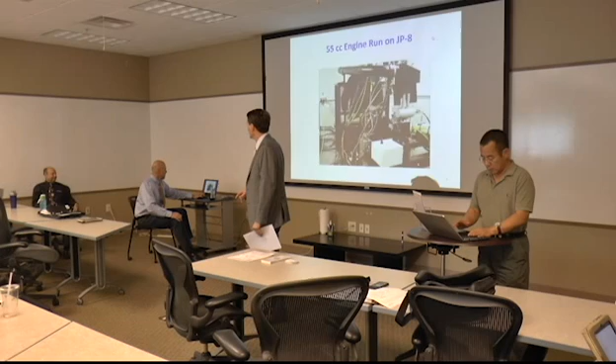Before I start though, Jim, I was just thinking of something while you were speaking about attendance at these collider events. Do you open this up to, say, second to last year, juniors, seniors in STEM? Anybody can come to these. Is anybody here a student or a recent graduate? No, we haven't had. Not yet, we haven't had. And the reason I was thinking about it, yesterday I met with a young gentleman who just graduated from UC mechanical engineering, but he really wants to get into the aerospace industry.

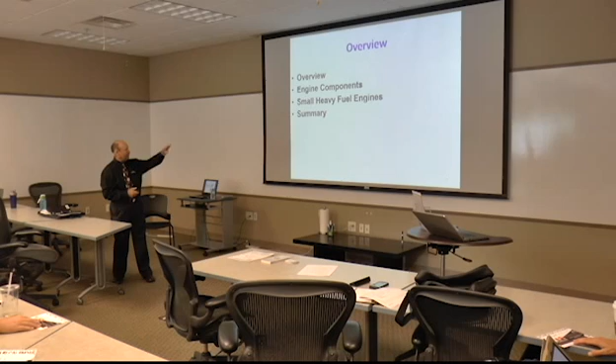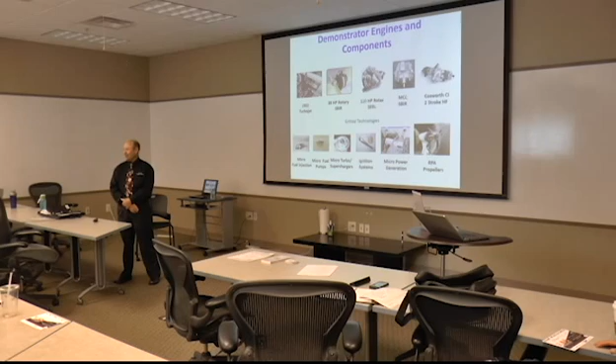Okay, I think when I first started this, they asked me to do one little SBIR project on an engine, okay? And I thought, gee, that sounds like fun for about 9 months, okay? Well, I think 9 months turned into about 12 years.

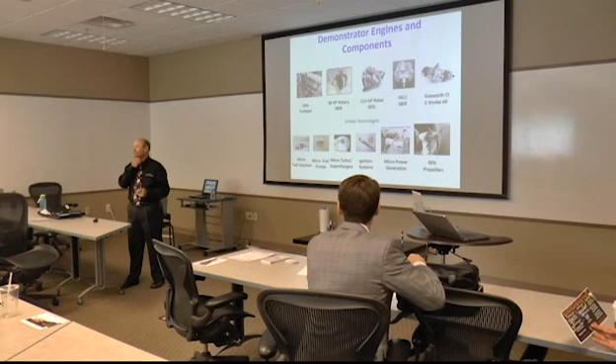So I started this with one project, okay? And then we got to a certain point and I said, well, what do we really need to do to advance this technology? And we had a meeting. I had a meeting with an Army guy who's now retired too. But we were talking about what do we need to do to advance this technology.

So we decided that commercial off-the-shelf components would not work for these small engines. Okay, so we decided we needed micro fuel injection, micro fuel pumps, turbochargers, power generation, so we needed everything on a much smaller scale. And it would have to be lightweight. A lot of these, some of these engines were using almost commercial off-the-shelf generators, which can weigh 7 or 8 pounds.

So what we decided, and then I said, okay, now how are we going to get money to do this? You know, and somebody suggested, well, if you go to OSD and you have an Army and a Navy counterpart, you can get OSD money.

So I go, well, okay, I got an Army guy, I gotta find a Navy guy. So it just so happens, there was a gentleman named Mike Gahn, who used to work across the hall in AFRL. He went out to China Lake, and he was actually working on the Ultra Endurance UAV, which was the Navy's, which has now become the RQ-21 Blackjack. So I said, Mike, I just want to use your name, we're going to try and get money.

And actually, the stars must have aligned or something, because everything just fell into place. So we submitted the projects, we got all the funding in, and we got started on all these phase 1 SBIRs, okay? And I think that round, I got 142 proposals.

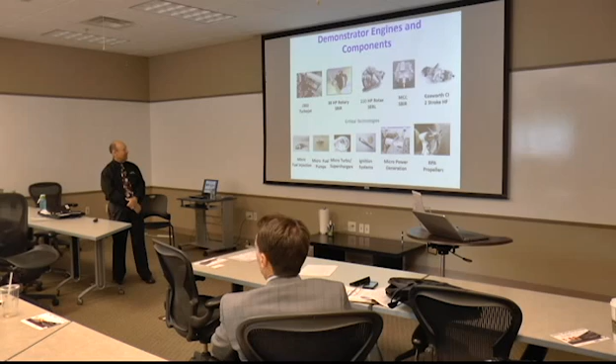Okay, but the 115 horsepower Rotax on the Predator runs on avgas. And for that engine there's 2 test cells over on the base, in the Small Engine Research Lab, and they've probably been doing experiments on that engine for about 10 years. So they probably know more about the Rotax than Rotax themselves, okay?

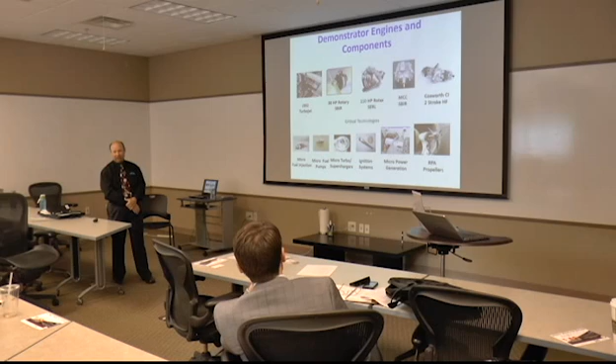That's a 2-stroke compression ignition diesel. And while I could put up a whole bunch of pictures of it, this is the only one I could pull off the internet that's not proprietary. But I will say this, it's 12 horsepower. The Navy wants to use it on the RQ-21 Blackjack. They have spent probably $6 to $8 million in development of that engine.

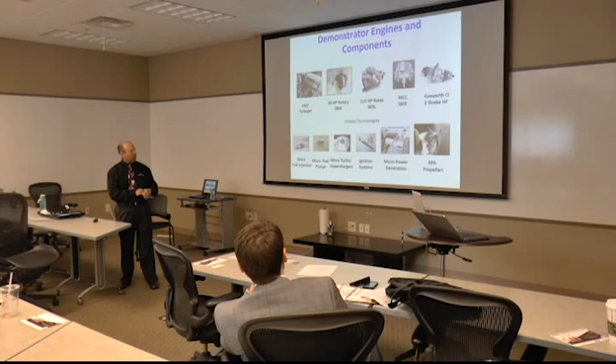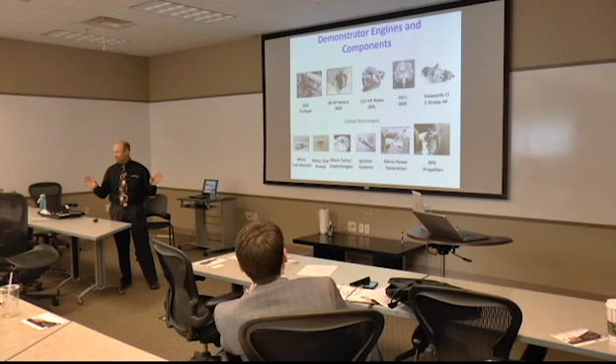So it is running, it has flown. I think they're working on integrating it into the RQ-21, which is gonna be one of the Navy's new airframes. And we will probably be doing some more work on that one, the Air Force actually helping the Navy out. Like I said, all us guys in UAS propulsion, Army, Navy, Air Force, we all get along real well. Most of us just want to advance UAS propulsion.

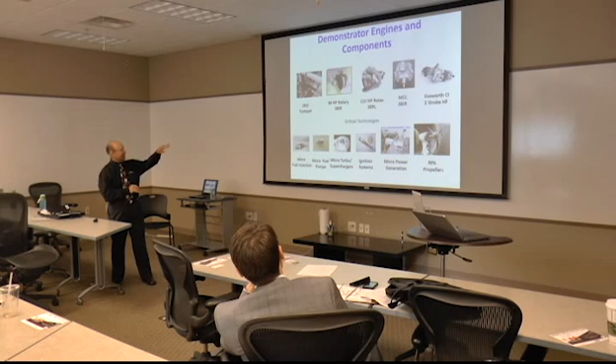So, I hate to pick favorites, but that's one of my favorite engines, okay? And then, these are just some of the engines we're using today.

What we needed to do is, critical technologies were fuel injection, pumps, turbochargers, ignition systems, micro power generation, and we've actually done some work on propellers. Now the problem with propellers is they make noise. So

This probably sounds a little silly, but the enemy actually uses dogs to detect propeller noise. I can't hear them, but it's kind of strange. We did find this out at one point in time, so we started working on quiet propellers.

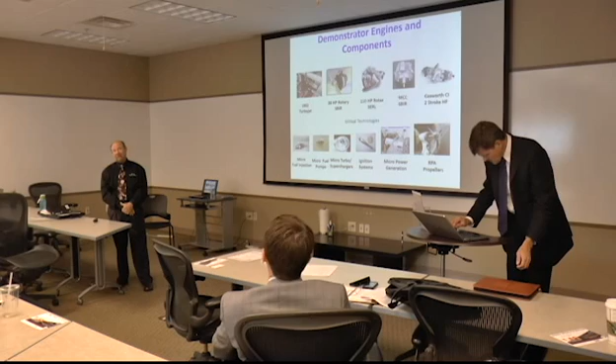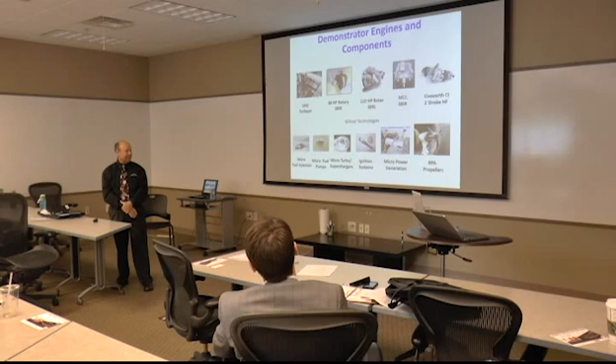If you really think about it, we make special propellers for C-130s and other aircraft. A lot of the UAV propellers are more or less hobby propellers. They're not actually designed as a specific component for a UAV. So that's one of the things we are going to have to work on. There's several propeller companies now, but one of the things we are going to have to do is really work on quiet propellers.

Okay, I'm going to talk a little bit. This is one of the several programs we did. It's called the Charged Fuel Injector. Without going in real deep into the theory, you put an electrical charge on a fuel droplet, and it actually breaks it into smaller droplets. If you remember from basic physics and electrostatics, if you put minus charges on each, they're going to repel. So you're going to get a pretty much homogeneous charge.

And it actually helps if you're going to run a fuel charge around a 90-degree turn; it'll actually coalesce when it makes that turn, so the droplets run into each other and start forming bigger droplets. The magic number is about 10 microns to make these engines run on heavy fuel. So you've got to make the droplets real small. We were able to accomplish that with these little elements. If you put little plates in there, you could actually make the fuel charge make a 180-degree turn. So it was kind of neat.

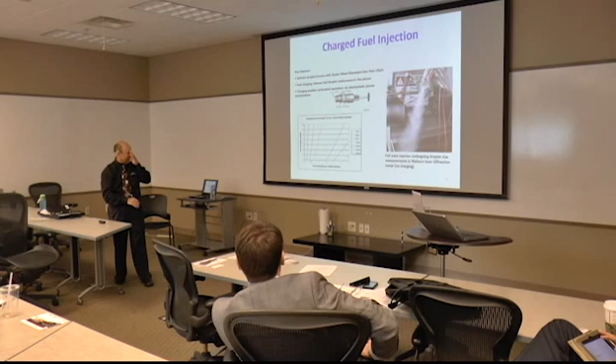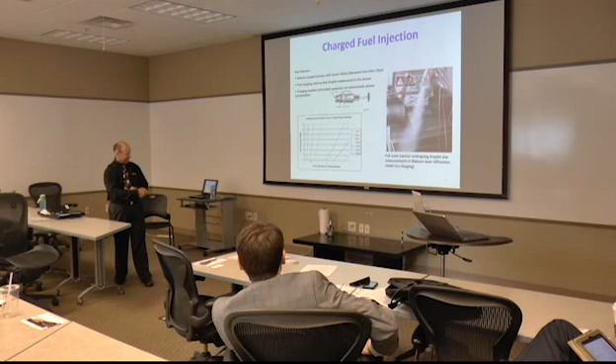This is one of the few things that really hasn't made it to the field yet. We actually did use this in a CFR engine, and it worked, but it never found its way on board yet. So it's one of the few things that we haven't really got on board yet.

Now, micro fuel injection. That was a continuous system; this is a pulse system. Just like in almost any vehicle, it pulses. As you come up on compression, you dump the fuel in. One of the problems we had is trying to use a diesel injector, which probably weighed 3 to 4 pounds. So we had to come up with another generation of micro fuel injectors. And to make them work, you obviously have to have a pump, and to do the pulsing, you need a controller.

This is probably the 3rd generation, after the 1st and 2nd generations we made. We're probably pretty close right now to having a system with injectors, a pump, and a controller that can be adapted to most small engines. What we have found is, I think we're at around a 50 cc limit. We're going to try to do a 28 cc, but 50 cc seems to be, at the moment, the limit. But we are going to start doing some experiments and look at doing a 28 cc.

Now, the advantage of this is, several of the engines are compression ignition, so we've actually changed gasoline engines to run compression ignition, so when you inject the fuel, you close off the exhaust port. With any two-stroke, normally you're throwing a little bit of charge out the exhaust port as the fuel comes up and charges the cylinder. So two-strokes, while they work well, are generally inefficient. You lose a lot of SFC there, usually around 1.2.

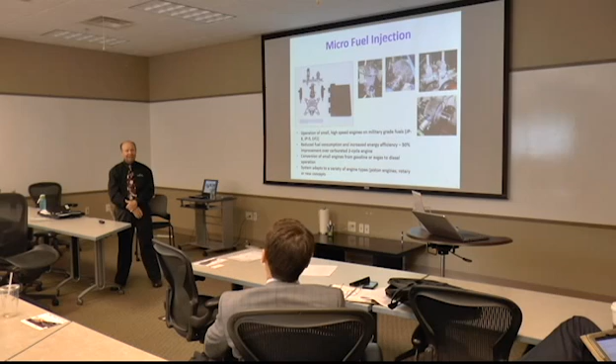Most people will do a throttle body system, in other words, some sort of fuel charging device outside the cylinder. You normally will lose some of your horsepower. So if you have a 5 horsepower engine, you may get 4 or 3.5 out of it. We were actually able to maintain horsepower, and we got the SFC down to about 0.6. So we improved efficiency, got better SFC, and it seems to run pretty well on that.

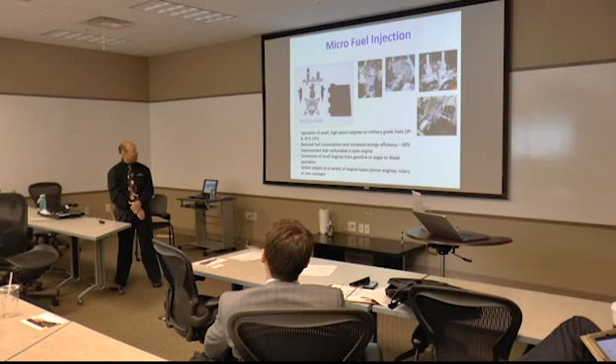So the solution to the problem is injector, pump, controller. You need all 3 of those in order to make this system work. This has pretty much been adapted to several different engines, and it seems to work pretty well on all of them. And what I'm trying to say is we're trying to get ourselves off gasoline. They want one fuel in the field, JP5 for the Navy, JP8 for the Air Force. If worse comes to worse, you can always run on some pump diesel, okay?

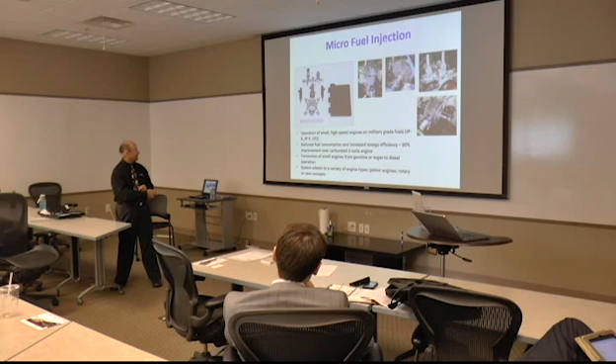Okay, so I just set up a little spray demonstration. If I can get it to start. I just turned everything on. I get a reading. I'm trying to figure out which I can advance. I can do it.

So this is generation 1 injectors, and we were actually measuring the droplet diameter of the fuel, and we also did a sort of magnified, slow video of how it worked. And I mean, it worked flawlessly. It really did for the first generation. And I think we were spraying at probably about 6,000 psi.

So what you want to do is, you've got to do it one of 2 ways. You've got to have a lot of pressure and run it through a pintle, or you have a lot of pressure and you push it through little holes in the injector nozzle. So the later ones, we're using the injector nozzle concept with a high pressure pump. And I think we're up in the 14,000 psi range.

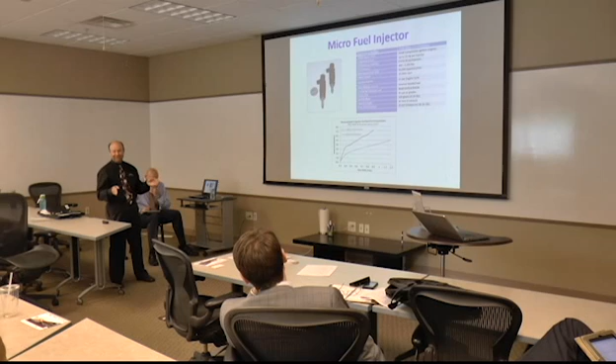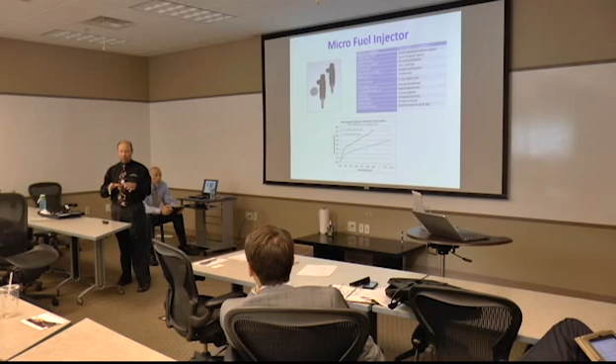So what we're trying to do now with compression ignition diesels, I don't know if anybody in here's got a diesel, but when you inject fuel, you're mixing it with air, and then you're compressing it, getting things hot enough, and it fires, okay? Well, there's a certain thing in there called ignition delay time. So as you mix the air with the fuel, it heats up and then it fires. You get a very violent spike, more than with the gasoline engine.

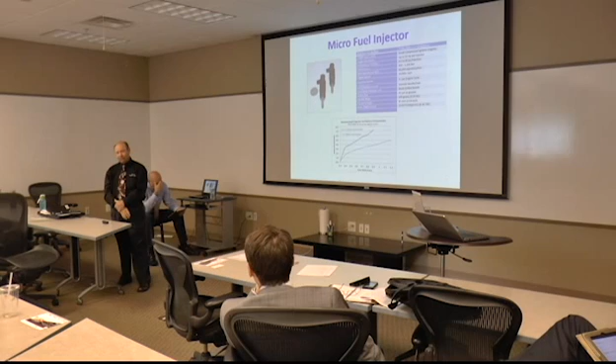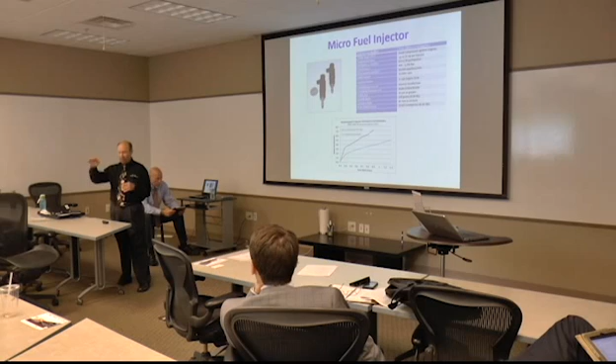So a lot of diesel engines, you have dual mass flywheels that kind of take up for that extremely heavy torque cycle. So on these small engines, what we want to do is called rate shaping. So you do two or three injections per cycle. It'll bring that torque spike down, because on these small engines, you're probably going to have a lot of vibration, and it's really going to be hard on the propeller when that hits. So we want to do rate shaping, bring that torque spike down, and we can do that with an injector like this.

So I can probably show you a little something here. That's the pump, about 14,000 PSI, 300 to 8,500 RPM. It'll run off an eccentric on your shaft, okay? It weighs about a half a pound, and pretty much on this injection system, you can tailor it for your engine, okay? One size doesn't fit all, that's the way you want to look at it.

Now, this is 55cc running on JP8. Everybody's sleeping, this will wake you up. So it actually does work. That's the micro injector on 55 cc's running JP8, maintaining horsepower at about 0.6 SFC.

And we actually learned a lot on this one. Initially, we were starting it with a spark plug, hitting it with a spark until the engine got up to thermal efficiency. And eventually we put a glow plug in it, just like a diesel engine. Keep the air up, it would fire right up. Only needed the glow plug for maybe a few seconds, maybe less than a minute. And once it heated up, it fired right off. And it does a nice job on JP8.

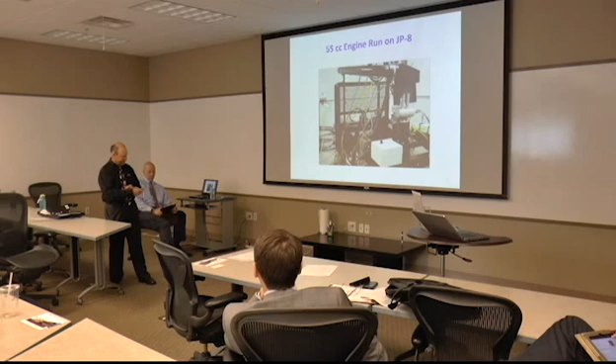And actually, the Cosworth engine, I think right now it's got Magneti Marelli injectors, but it actually has run this injection system and made 12 horsepower. And I think we're going to work on the Cosworth. One of the things we are going to work on is rate shaping. Right now the Magneti Marellis run one pulse.

So what we're going to do is put this injection system back in it, look at rate shaping and smoothing that torque spike out. And the Navy is extremely interested in putting this on the RQ-21. So the Air Force, being the nice guys we are, we're going to help them out.

Also there was this motor-driven micro fuel pump. A lot of times the other pump's mechanical; this one's electrical, okay? And it was actually designed for those instances. If you are running compression ignition, you need a lift pump. Most diesel engines, you have a lift pump till it gets to the injector pump. It could be used for that, or it can be used as a straight pump for either a gasoline or diesel small engine.

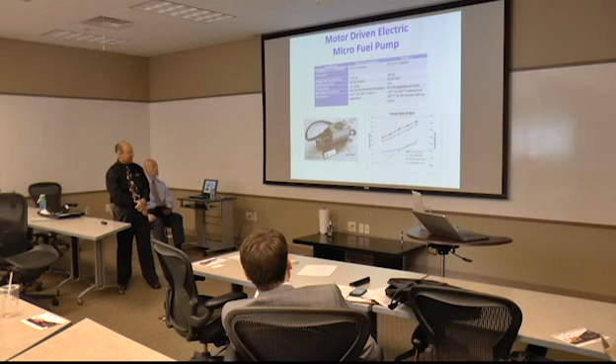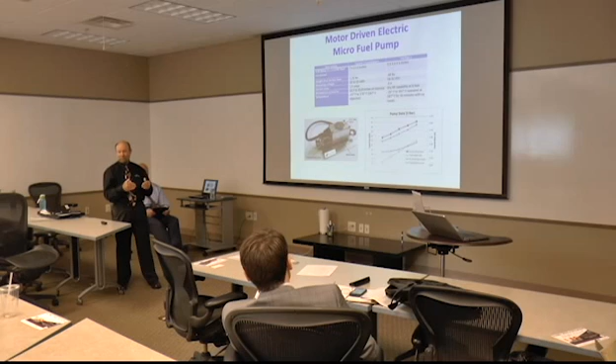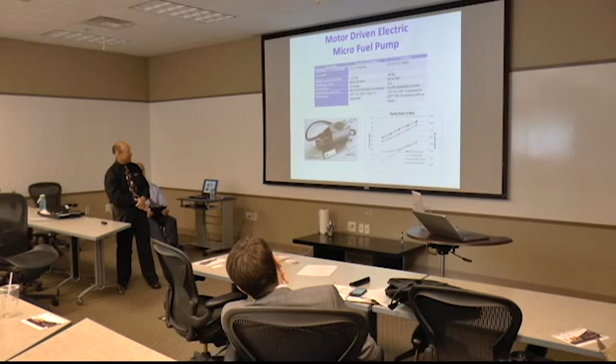But the nice thing about it is most injection systems use a pressure regulator. This pump actually does the pressure regulating for you. So you can ramp it up, ramp it down. Usually it's on a 45-degree angle, and it's not a particularly heavy current draw. It's about 1.5 amps, it'll work anywhere from 18 to 32 volts, and weighs about 1.25 pounds. And I'm thinking we could probably beat a little weight out of that yet. I think we've run it continuously for a couple thousand hours without a failure.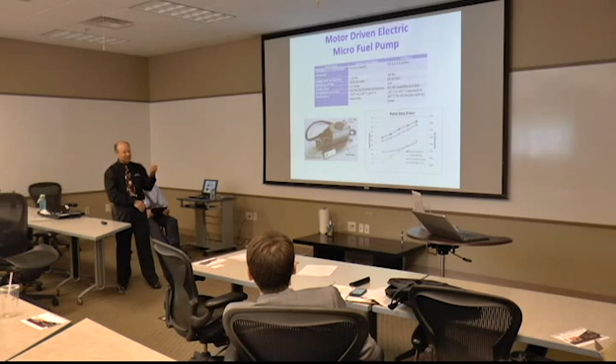So the next thing we're gonna do is actually do some durability testing. We're actually gonna flight test it. And if anybody in here has ever done any flight testing, it's very expensive. It takes about a year to fill out the paperwork to get it done, and you gotta have a place to do it. Depending on the size of the vehicle, I think there's a place over in Indiana that you can do it. I don't know if there's a big place around here. I know there's one over in Maryland, but it depends on the size of the vehicle.

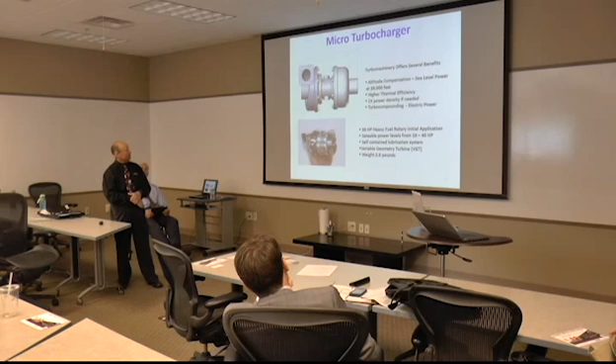Okay, micro turbochargers. One of the things that we discovered is when you get to altitude, a lot of these engines need to stuff more air in, okay? If you go to high altitude, you run out of air when you get to maybe 10,000 feet, something like that. We've actually flamed a few of them out. They just didn't have enough air and they quit. So we did develop this micro turbocharger, it weighs about 2.6 pounds, and it's got a variable geometry turbine. If anybody's a turbo guy in here, you know: when you're at low RPM, you're not dumping in enough air. So if you have a VGT, you can keep that thing spooled up.

And it should be scalable. I guess it is saleable too, but it's scalable from 10 to 40 horsepower. I think we've used this on 38 horsepower. We're thinking now that we actually have to go smaller. Something like the Cosworth is normally aspirated. We need something down to about 10 horsepower. So this is a little too much weight. It can't buy its way on the Cosworth. So we're looking at something a little smaller for the Cosworth. It's a great engine, but it does lose it when they get to altitude. So we are going to look at developing a very small turbocharger for it.

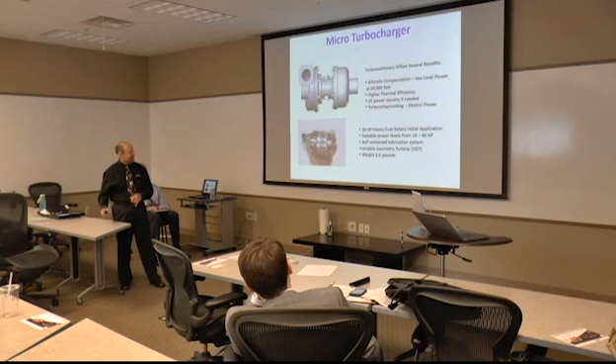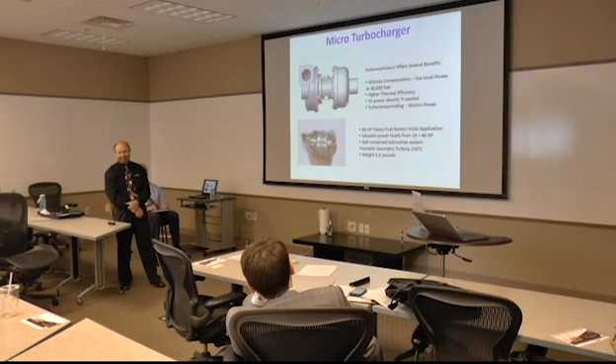And this was kind of a fun project, really. You can buy a lot of automotive turbochargers right now, but I don't think you're going to find anything that weighs under, I don't know, the one on my Power Stroke diesel. It takes everything I have to get it out. So this one's kind of nice. I can carry it around.

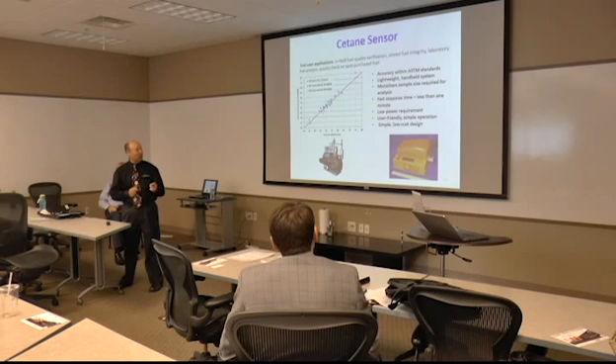Cetane sensor. One of the things we did learn with JP-5, I don't know if there's any fuel guys out here, is that diesel engines like a cetane rating of about 45 to 50 to ignite. The lower that number is, the longer the ignition delay time. So, I hope there's no Navy guys in here, but anyway, they were running the Cosworth, and all of a sudden one day it wouldn't start.

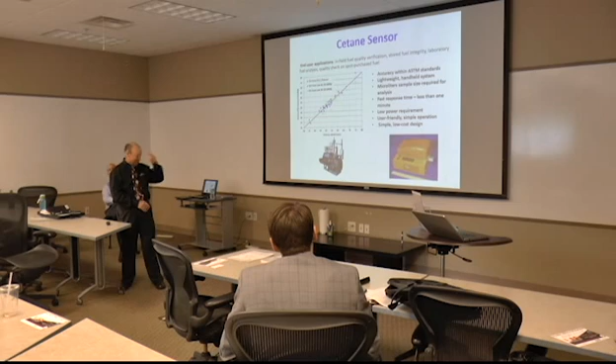So they tore the engine down trying to figure out what was wrong. And then somebody suggested we should check the fuel. Well, it had a real low cetane rated fuel, so it wouldn't. And I believe this was one of the last ones I wrote up, was a cetane sensor.

That CFR engine, which at the bottom weighs 1,900 pounds, it is the standard today. It was developed in 1928, okay? They still build those today. That is a standard for testing octane and cetane in fuel. Okay, so I had this idea.

We need a quick and dirty way to check jet fuels for cetane ratings for these small engines we're going to run on JP-8. Okay, and I actually wrote this one up, and it's pretty neat. I mean, I can carry it around. It takes just a little bitty sample, and it'll give you a readout in a minute of what the cetane is in the fuel.

Now, my idea was, hey, I wanted a cetane sensor. I wanted it embedded in the controller, so it was real time, okay? So whatever the cetane rating is for fuel, it adjusts your injection timing, okay? And you're always at peak performance.

So we haven't taken the next step yet, but I think this is a step in the right direction, because I'm sure some Marines could probably carry one of those machines around, but us Air Force guys, we're not that strong, so.

But anyway, it's really a step in the right direction, because I'm afraid, you know, when you get out there and you get a low cetane rating fuel and your injection timing isn't quite set right, you're not gonna be at peak performance, so.

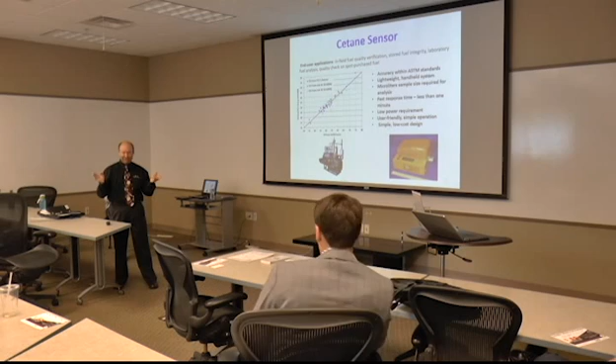And I think on the Cosworth, they had to advance the timing like 3 degrees, and it was like maybe a 33 cetane or a 32 cetane. So, and then actually you put it back together and it started right up, but you know, it was a lesson learned, something you learn as we go along.

Okay, catalytic glow plug. So a lot of these diesel engines we were looking at, the glow plug takes a lot of power to run. Okay, so I came up with this idea of a catalytic glow plug. Okay, so what happens is you energize the glow plug on cold start, you get the engine started.

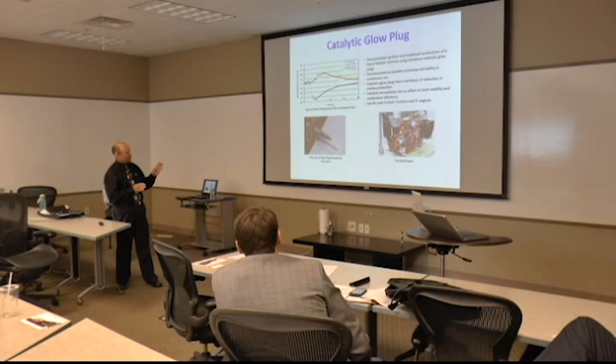And actually what we found out is that the glow plug actually enhances your combustion, and you have a great decrease in the amount of smoke that comes out the tailpipe, because when you first start up, you're not at thermal efficiency yet. And actually, it helps you as you're running along. So it can be used in both turbines and ICs, and there's several engines out there using these now, and it's been pretty successful.

Okay, the next thing is microcontrollers. Okay, UAVs, a lot of them are fairly lightweight. You can buy lots of commercial off-the-shelf controllers, but I used to have a little bit of a joke. I used to work on Joint Strike Fighter. It has a fuel-cooled controller, and I always say there's more fuel in that controller than in my UAV.

But controller, one of the problems we have is having a lightweight controller that will do everything we want it to do, but we can't have the weight penalty of a commercial off-the-shelf controller anymore, because we are advanced technology, all the injections, the pumps, everything will run.

So this is one of the ones, this is in a phase 2 right now, and it can be tailored to your UAS platform, for whatever your input-output is. So, and I think the phase 2 just started like 3 or 4 months ago. So it's still in its infancy.

But a lot of times, some of these companies didn't want to let out what they were doing on their engine. They wanted to keep it, so along with a commercial controller, you were kind of confined to what they do. So this one's more tailorable for what you need.

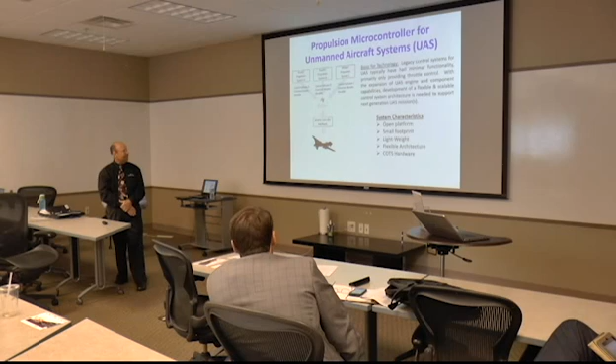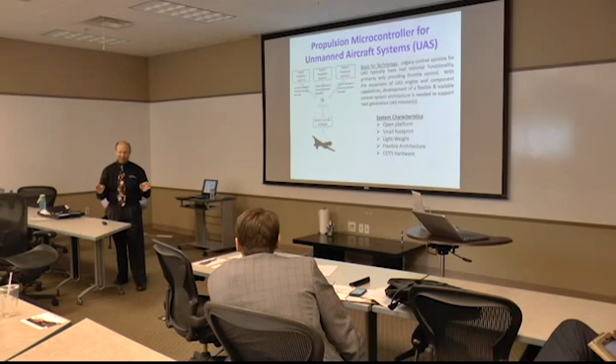And the other thing we want to do is we want to do this rate shaping, so you got to have a controller that'll do this. So most of the big diesel controllers will do that, but I don't think we can afford to carry one of those around and wait till it happens.

So propeller technology. So while this isn't really related to JP-8, one of the things we did do was develop propeller technology for UAVs, so you could design a propeller for a UAV.

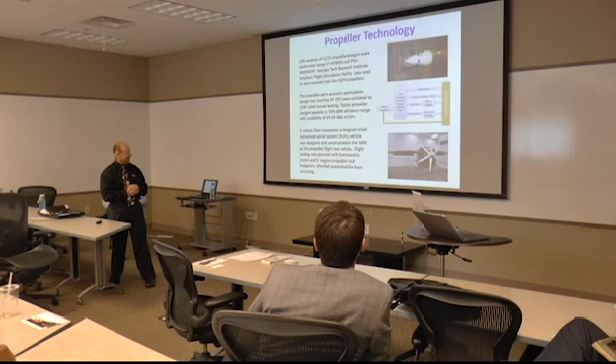We wanted to increase efficiency and decrease noise. This one came out nice and we really wanted to flight test it, but unfortunately the money just wasn't there to do it. It turned out to be a very good piece of work, and it's still there waiting for us, so when we start doing propeller work again, we're going to test it.

Nutating engine, this is one of the research engines. It goes anywhere from 5 to about 150 horsepower. Anybody know what the term nutating is? We always used to get everybody saying mutating, but no, it doesn't mutate. It's actually a disc that just kind of spins on a ball.

This one actually has 4 chambers inside. You have 4 processes at 270 degrees, you get a power stroke every 180, and the center of mass is around the center. So it has some pretty big advantages in power to weight, having 2 power strokes per revolution. It'll run on JP8. This one is a smaller one, about 7 horsepower, and we've had them all the way from 7 horsepower up.

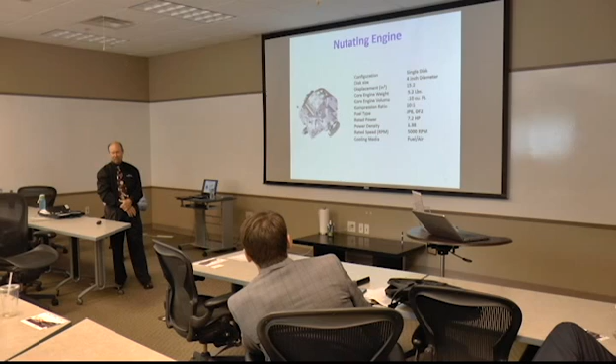We're working on the sealing. To seal this engine there's radial seals, a lot of seals in this engine. I think we're closing in on completing the 3rd generation seal design, going to the 4th generation. Each time you fix one seal in the system it usually taxes another seal in the system. So we're working on improving the ball seal now. But the nice thing about this engine is good power to weight, small package, and it will run on just about any fuel, so of course it'll run on JP8 pretty easy.

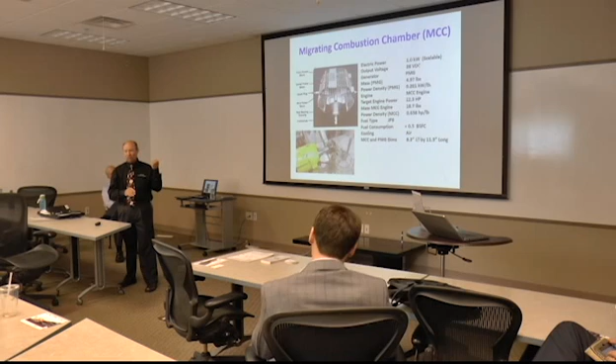Migrating combustion chamber. Think of this as a block inside an engine that's on a Scotch yoke. It's a very unique design developed by a gentleman up in Fort Wayne. It actually has 2 power chambers, if you will, and they call this the side engine - suction, induction, dual expansion. So this is actually a dual expansion engine, very lightweight, and it's about a 2-hour brief in itself on how it works. But just to let you know, it does the original firing event expansion, then there's another chamber below that it expands into, and by the time it exhausts it's almost at ambient pressure. So it's a really neat engine.

I actually own one, I bought it on eBay. This company had a run of about 200 of them. The advantage of this one is the propeller makes more noise than the engine, so it's a very quiet engine. It's easy to start. I think one of the projects we had with this one was a permanent magnet generator, and it's very quiet - that's the big advantage of this one.

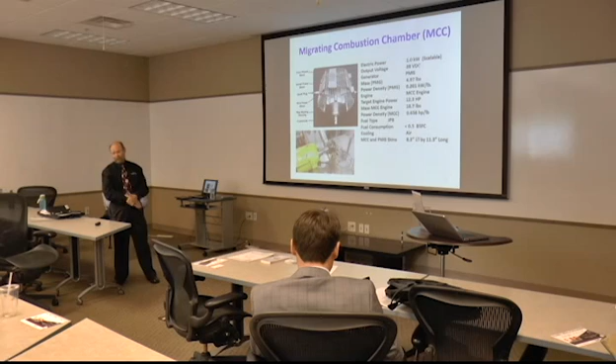If you want quiet, you have to figure that out - and that's running an open exhaust, without a muffler, a straight pipe if you will. That's actually my engine on the test stand down there. That's an FE 120, about 2 horsepower.

Gas turbines, small gas turbines. With the rotary and almost every engine out there we're running, the big thing is time between overhaul. The rotary, 200 maybe 250 hours most - I think the Rotax 914 is probably about 1,000. They get about 1,000 hours on them, then they retire, done.

Scan Eagle, maybe 400. So the nice thing about small turbines is you can easily get 2,500 hours time between overhaul. They like JP8. They don't coke up like one of the problems we're seeing with running engines on JP8, where the oil we're using for lubrication can't take the intense heat of these small engines. So we're seeing deposits on pistons, exhaust ports, rings, and eventually you get enough deposits on that ring and it closes up and you lose compression.

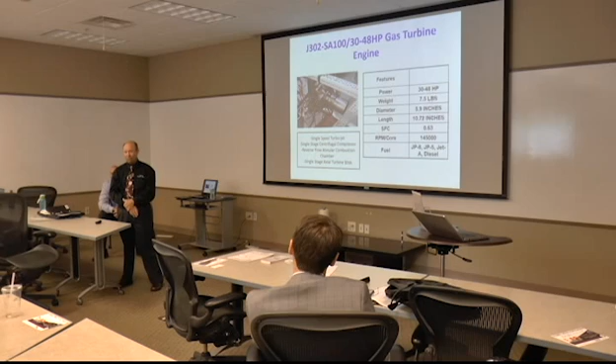The nice thing about turbines - this one's 7.5 pounds. Now we don't have any accessories on that, but it still has an SFC of 0.63, and it will run on JP5, JP8, Jet A, diesel. So I'm thinking if we want longevity, time between overhaul, and you're going to run the heck out of something all the time, you're probably going to want some sort of a turbine powered UAV - could be a turbo shaft or a thrust engine, either way.

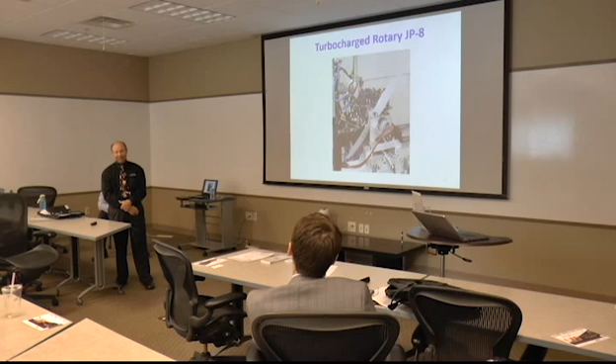This is the turbocharged rotary, JP8. This is the one they use on the Army Shadow. The Army Shadow runs on avgas, but we actually converted this one to run JP8. On every one that everybody else has done, they've lost horsepower - we actually went from 38 to 42 horsepower.

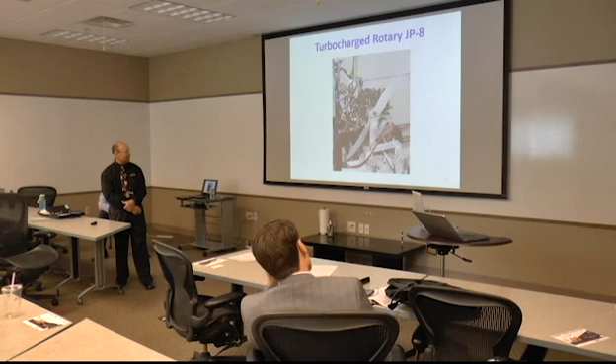We added the turbocharger, it'll give it a little more oomph. Runs on JP8 with the micro injection system, and we made 42.1 horsepower at 8120 RPM. So we've taken it from avgas to JP8 and made the horsepower. Now the next thing is to work on materials and durability for this engine. If you ran this at 42 horsepower, I'm not quite sure exactly how long it would last, but we've gotten to the point where we can easily run these on JP8. If you're going to run them wide open throttle, you're probably not going to get the life out of it you want.

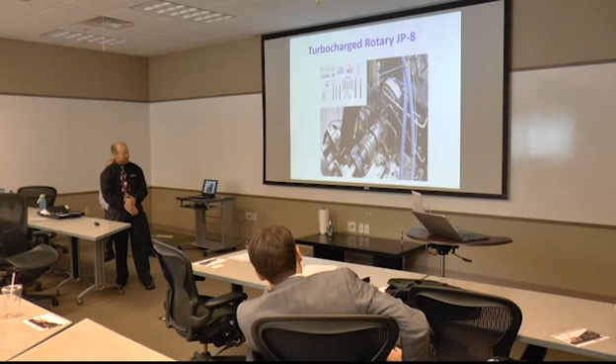So all these projects, and I haven't covered everything we've done, have reached TRL 6 and 7. Some of them are deployed, some are flying, not everything yet. Getting over that bridge from development to actually flying as a product is pretty tough. The heavy fuel conversions are showing really great progress.

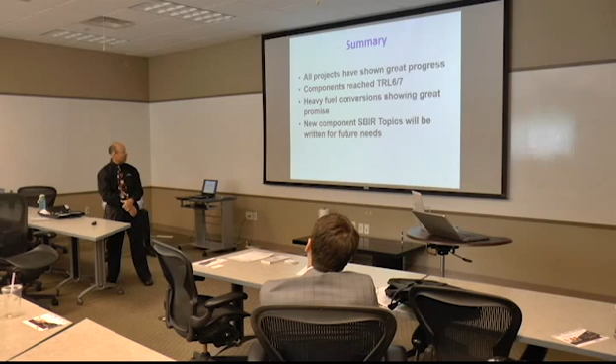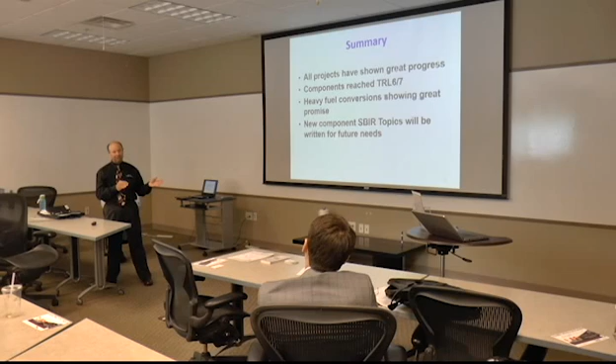I think there's going to be some new component SBIR topics to take up, now that we've got everything running, we're experiencing secondary problems, like oil coking and other longevity items. So the next ones are probably going to be, let's see.

Possible propeller dampers for small compression ignition engines, quiet propeller designs, and I had this idea for morphing propellers. If you know anything about materials, certain materials you put an electrical impulse in, and they bend. So I was thinking if we can make a propeller and somehow impart an electrical charge on it, without having a mechanical means to do so. I don't want to claim to be an expert in this area right now, just an idea.

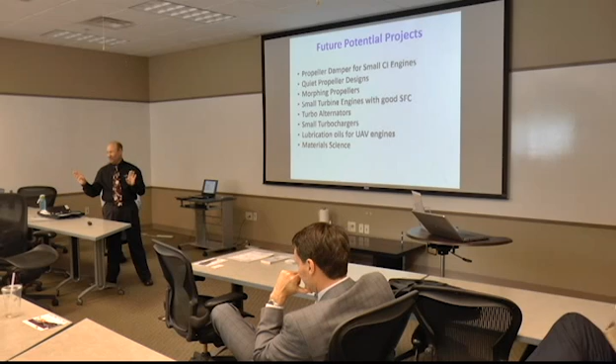The AFRL is doing that, right? That's a research project at AFRL. I'm not aware of that one. It could be, I've seen photos of it. Might be up in materials land. But I'm just saying, we put an electrical impulse in there and it morphs the propeller to where we want it to be, without having some mechanical means to change the propeller. The photographs I saw were on a wing, but the application would be the same.

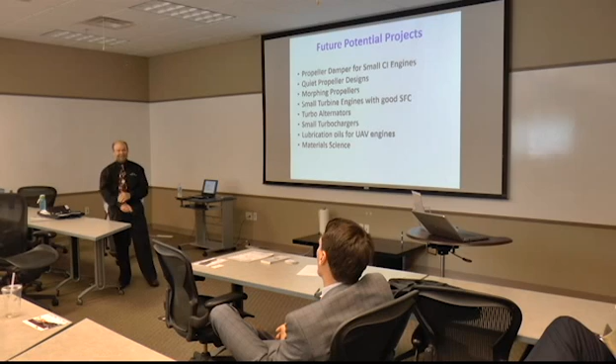Turbo alternators, rotary engines. On rotary engines, there's a lot of energy coming off that exhaust port, more than any other engine. So why not put that to good use? We could use that exhaust energy, build what I would call a turbine, put an alternator on the other side, we'll call it a turbo alternator, and probably generate enough power to get rid of the 7 or 8 pound generator they have on there now.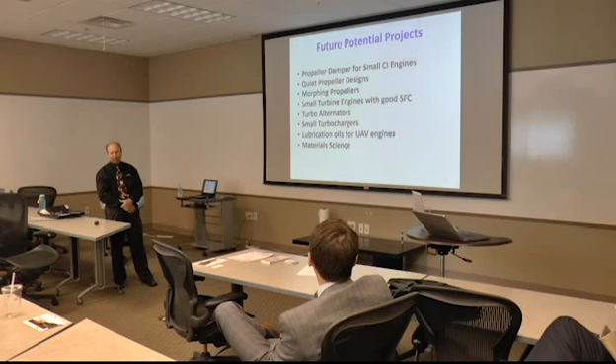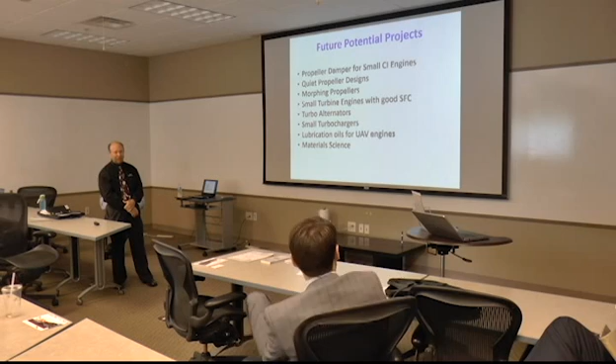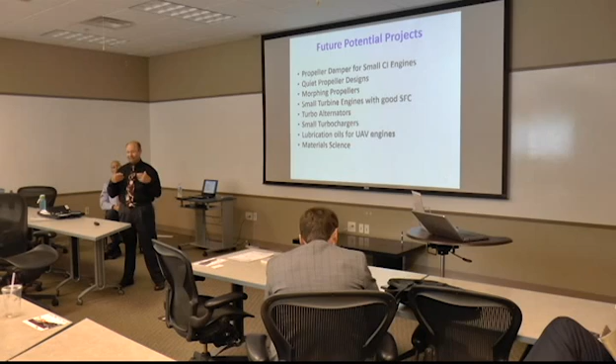One of the things we've discovered recently is lubrication oils. The problem is, for 2 strokes, you mix oil and gas, works perfectly. You mix oil and JP8, we're not sure, because what we're seeing is a lot of deposits on pistons, exhaust ports, rings, and the little analysis we've done appears to show the oil is breaking down. Now, is it because we're mixing it with JP8, or because the engines are just running too hot? I'm not sure. So there may have to be another generation of oils specifically designed for UAV applications.

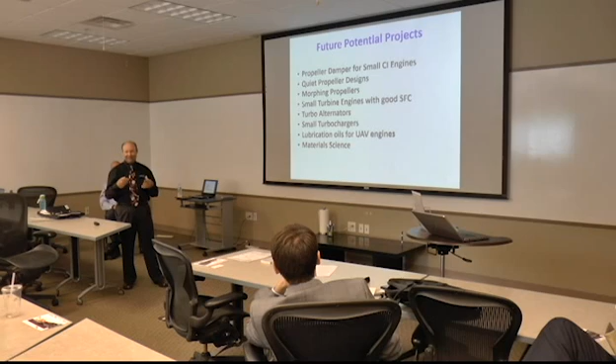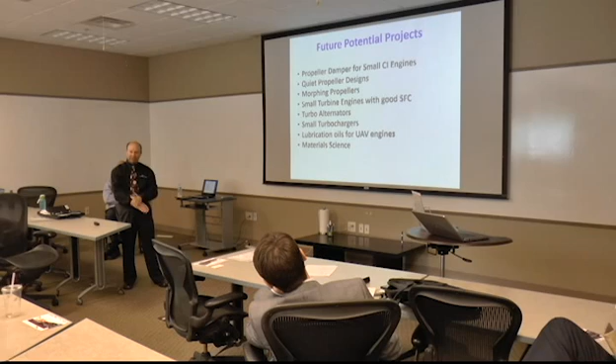And material science, looking at coatings on cylinders, pistons, heads, bearings, anything that wears out. Non-lubricated rotary engine seals, we're looking at that too. These new SBIRs will be aimed at fixing problems that, because we've gone to JP8, we've discovered downstream that we need to fix.

Greg is now the Class 1 through Class 5 UAV propulsion lead over in AFRL, so I help him out from time to time. Any questions? Yes.

You talked about fuel system modifications, ignition, glow plug modifications, but you didn't talk about any modifications to the connecting rods or the crankshaft for compression ignition. Well, I would say this, if you're going to run compression ignition and take a commercial off-the-shelf engine like an OSG 255, you're going to have to do some bottom end work. These are just experiments to see what we can do. And that's where I say material science is going to come in. We're going to have to look at all these things. If you're running compression ignition, you're going to hammer that crankshaft and connecting rod. Plus the crankshaft, the propeller, all those things have to be looked at.